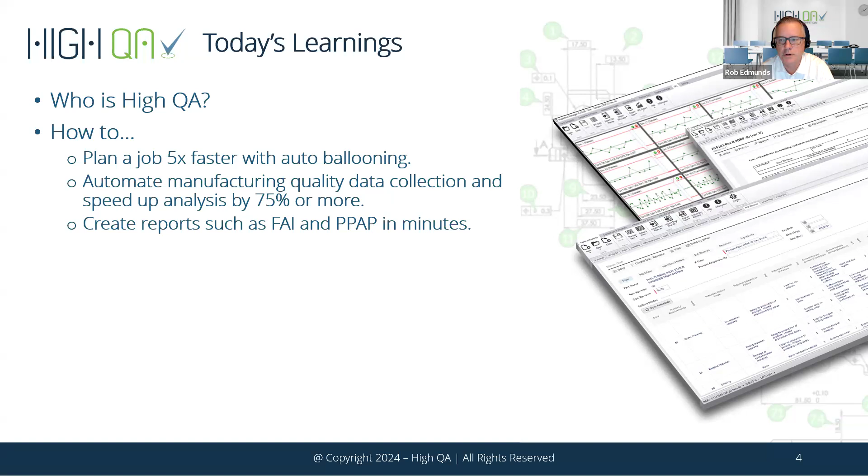We'll demonstrate how we can automate data collection, so getting those inspection results in real time. So now you have the ability to analyze all of that data quicker. Bottom line, it's real time, so it's at your fingertips. And then lastly, of course, we've got data back in the system, let's be able to report against it. So whether it's an FAI or a full submission packet, we're going to show you how we can save significant time getting that reporting out.

A little bit about High QA: over 1,300 customers globally, over 5 continents. We have over 20,000 users. Big thing for High QA is data security, but also with that, having a collaborative mindset. So let's break down some walls. Let's pull manufacturing and quality together. And then lastly, we're realists. We understand your success is our success. So we do have a customer-driven culture.

High QA is really reimagining quality manufacturing management. So pulling a system into an all-in-one database where you can plan your quality, you can capture inspection results and then report against it. And with all of that, that ensures that you're on time, on quality, on budget.

Like I mentioned, High QA is an all-in-one database-driven solution. So we're eliminating those silos of data that aren't connected, and we're pulling it all together into one database that in itself can also integrate with other systems you may have, ERPs, PLMs. So with no further ado, let's jump into the product and we'll give you a look-see at High QA.

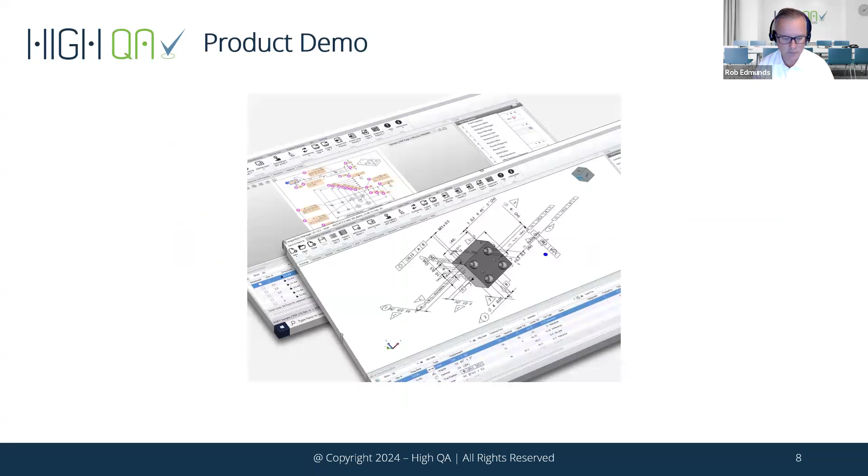Lisa, can they all see the High QA software? Yes, I can see it. Perfect, thank you. All right, let's get started.

We're going to start from a wizard. And the reason I'm doing this is it's going to allow me to establish some defaults up front for the system. And when I say defaults, we establish what are called part categories in High QA. So think of this as an area where for a specific customer or for a specific part type, I can establish defaults throughout the High QA system, whether it's simply how do I want my balloons to look, colors, sizes, all the way down to what reports are required in my submission packet. So I'm setting all those defaults up front.

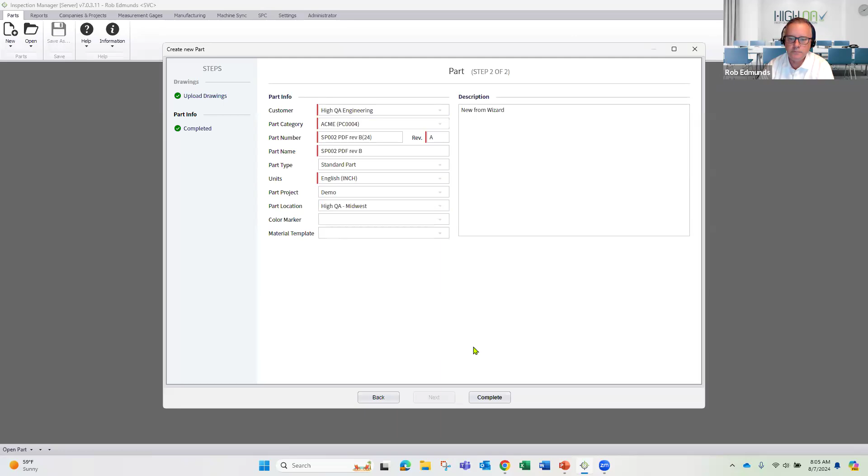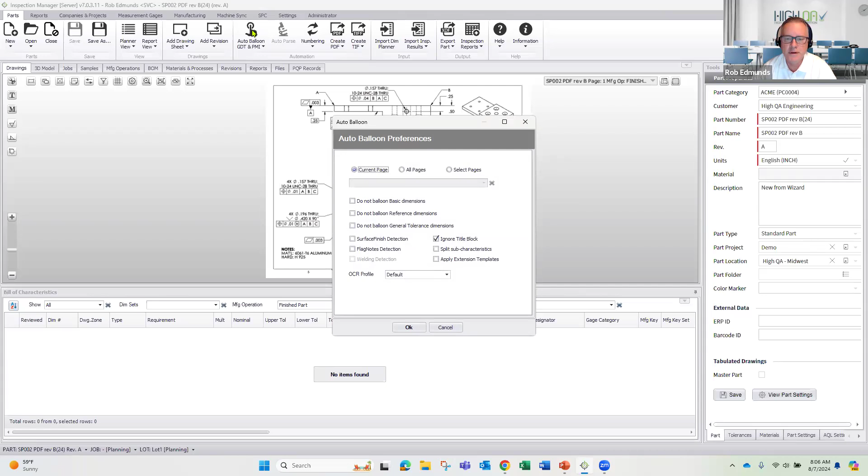All right, so I've pulled in our 2D print. We also work with 3D models, so either or. But to get started, all we're going to do is come up here and hit the auto balloon. And do note, we can handle multiple pages. If you have a packet where you need to select certain drawing pages, you can do that. You also have the ability to turn off certain things. Maybe I don't need to balloon reference or basic dimensions. I can turn those off. But we're going to hit OK.

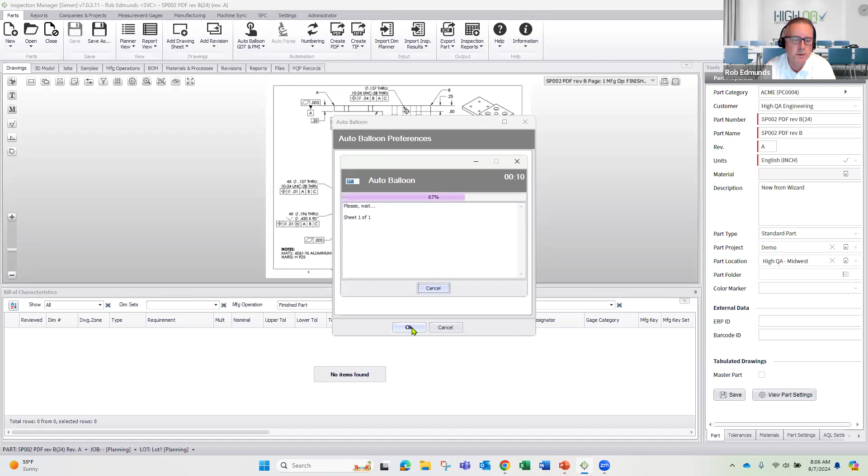And what that's going to do is engage our OCR. So the OCR is the optical character recognition software, something that we developed on our own. It is ours. It is proprietary. I always jokingly say it's not patented. We don't want anybody to steal it. It's the best OCR on the market, bottom line.

So once I've engaged that, it's determining the border of that picture. And then once it's done that, it's going through and finding all of the GD&T, all the features on that picture. It's ballooning it, but more importantly, it's also taking that through a digital transformation.

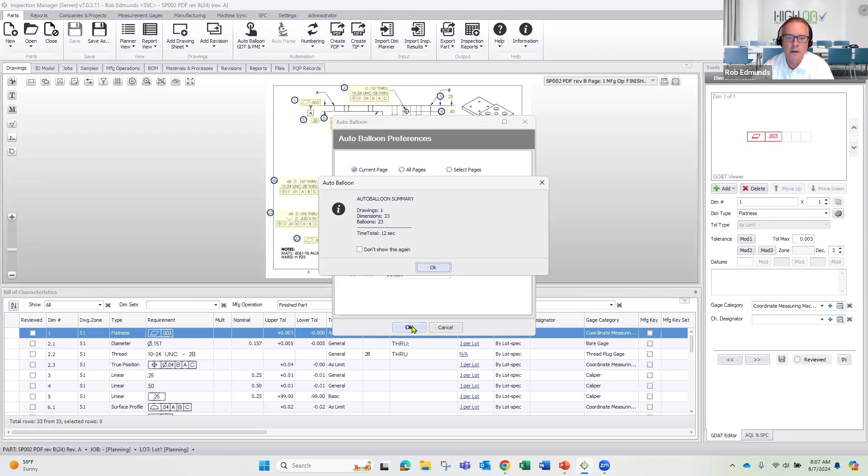So we're working with a picture, but once the ballooning process is done, now I've got executable data in what we call our bill of characteristics. So as you can see, in 12 seconds, we've got 33 dimensions, 23 balloons, and a complete bill of characteristics, right? So I now know every dimension, what type of dimension, the requirement, what are my tolerances on that dimension.

And like I had mentioned early on, I set some defaults. So one of those is my sampling rule. I've established my sampling rule as 1 per lot. And again, it could be anything. It could be AQL based. I also have the ability to establish default gauge categories based on the type of dimension. So as you can see, every linear dimension, I'm going to use a caliper.

Now, keep in mind, this is just a category. It's not the exact gauge I'm going to use. But every true position, I'm going to use a CMM. So that's all been established. Again, saving me time. I've already started to establish my inspection plan.

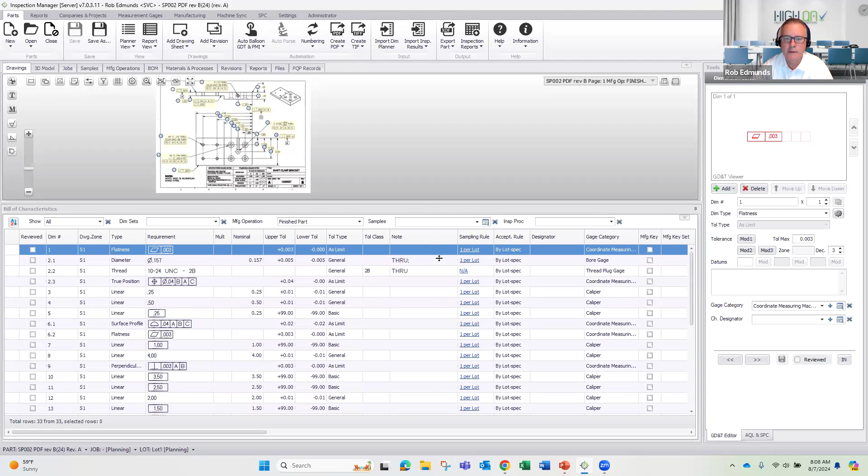Now with High QA, we provide you many tools so I can continue to use the OCR to capture additional information off of this print. So for example, when I brought in this part, it doesn't know the part number or name, it's just using the file name. But I can use these utilities around the drawing window to capture that additional information. So you could come up here and, hey, I want to extract information off my title block. I just go ahead and select that utility, and then I'm just box selecting the information using my mouse, and you'll see things update over on the right.

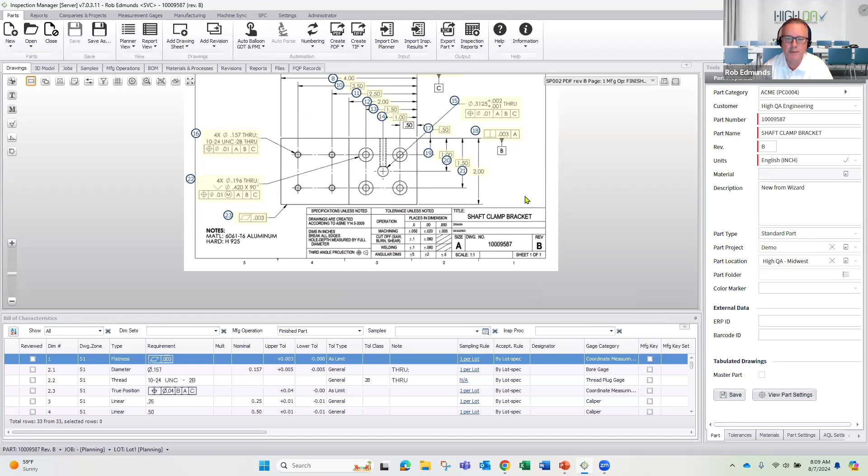So now I've got my part name. I can come in here, let's grab the part number. Let's even grab the revision. So the nice thing about this is not only am I getting the information in quickly, but I'm also getting it in accurately. I could have typed that in, but for those that know me, you don't want me typing. I'll fat finger something, then we've got incorrect data in the system.

For those of you that need to balloon notes, we provide you utilities so you can do that. Now, by default, we're not going to auto balloon notes because there's no standard around notes. So we give you this utility so you can simply come in, you box select your note, and you'll see it parse the information over on the right. But it also is now included in my bill of characteristics, and it's in there as a pass-fail. So it's going to be on my inspection plan.

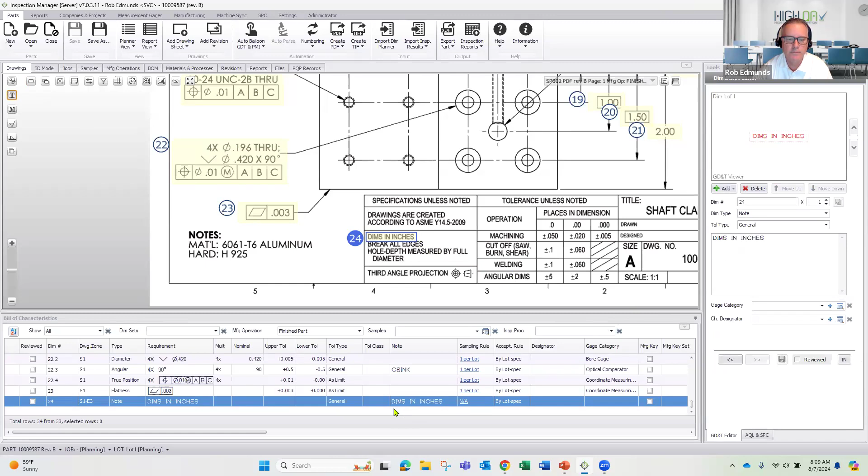For those of you that need to track material, we also provide you utilities so you can capture the material requirement off the print. And again, just box selecting the information, and you can see it now changed over to my materials and processes. So now I have my aluminum requirement in the database. Now, anytime you see a pencil within High QA, it just gives you the ability to drill in to where I can add additional information. The material code, maybe I've got a spec number. Maybe I want my supplier.

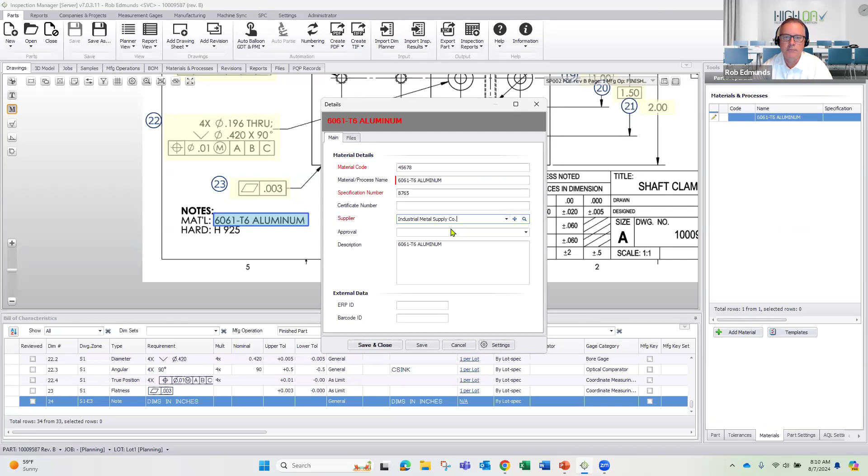But more importantly, how about being able to upload the material cert into the database so it'll flow to my reporting? I've got a sample material cert here. Let's go ahead and get that into the database.

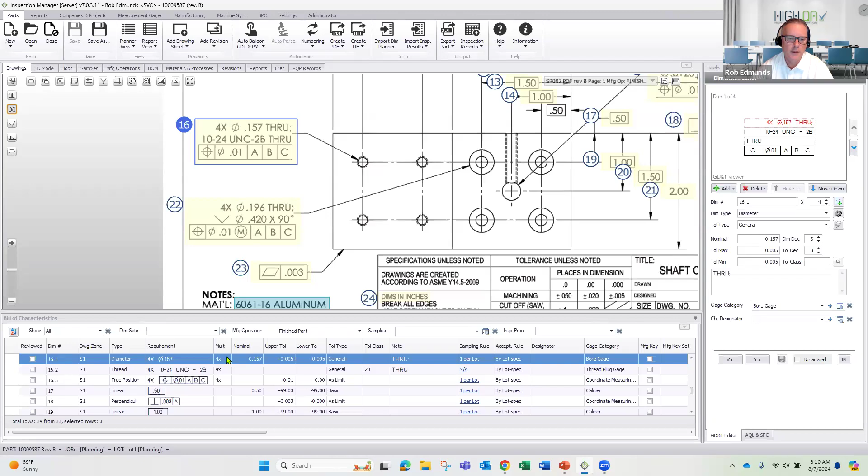All right, I already bragged a little bit about our OCR. Let's pick on one of these. So as you can see, Balloon 16 has 3 different callouts, right? It's got diameter, thread, true position, and you're seeing that in the bill of characteristics, diameter, thread, true position. But also there's a multiplier, right? Because there's 4 holes, and you'll see that in the bill of characteristics as well. So at the end of the day, we're looking for 12 results, right?

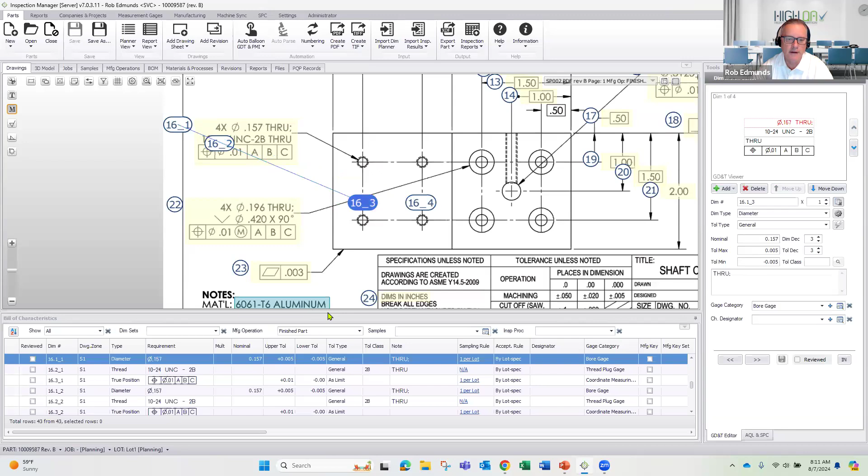Now, for those of you that run into a scenario where, hey, your customer needs you to identify each hole with its own unique balloon, we have that capability, and all I need to do is multiply out the dimensions. And now I have unique balloons, so I can identify each individual hole. And you'll see down in the bill of characteristics, now that we've done that, now we have all 12 lines. Okay. Now, for those of you that have that requirement and the print has 50 balloons, I apologize, because that becomes a very busy print.

All right, a couple more things to jump through here. For those of you that get drawings in a unit of measure that you don't want to work in, say I want to work in metric, but I'm getting this print in inch, right?

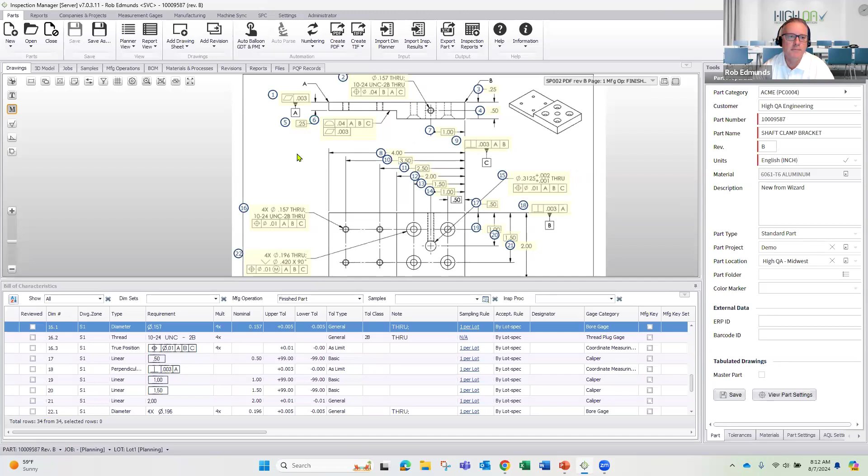Which is the default that was established before I ballooned the print. Well, if I need to see this print in metric, it's just a matter of clicking on the opposing arrows. Now the print is in metric, right? So I do have the ability to toggle between the units of measure. I can establish a plan in one unit of measure, collect the results, and then toggle back to the customer's unit of measure that they provided.

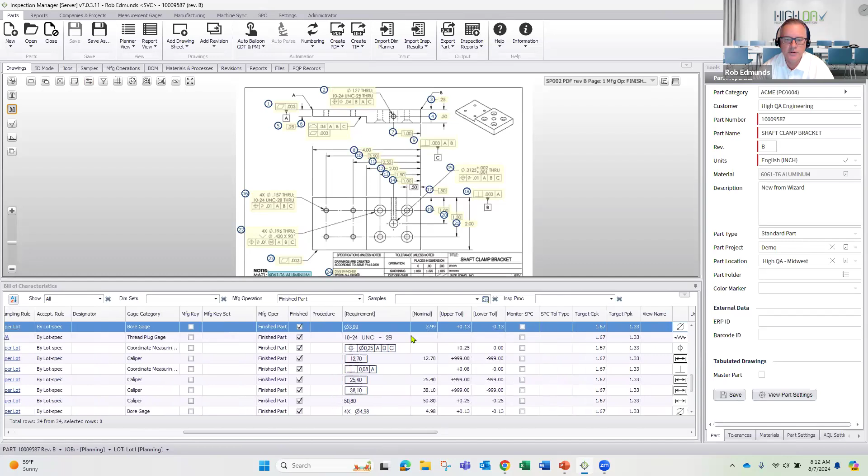And again, that's not smoke and mirrors. It's not doing the calculation when I hit the button. Actually, if you remember that first, whatever it was, 15 seconds when we ballooned the print, here is the default, which is an inch. But if I scroll over in the bill of characteristics, the conversion was already done, right? So there it is in metric.

All right, so here's another nice feature, right? We'll never claim we're going to be 100% on ballooning prints. Prints get busy, things get stacked on top of each other. The human eye has a hard time figuring it all out. But we provide you a utility called whiteout balloons. So when I click on this, it's going to eliminate everything I've captured, right? If I hover over, you're going to see them.

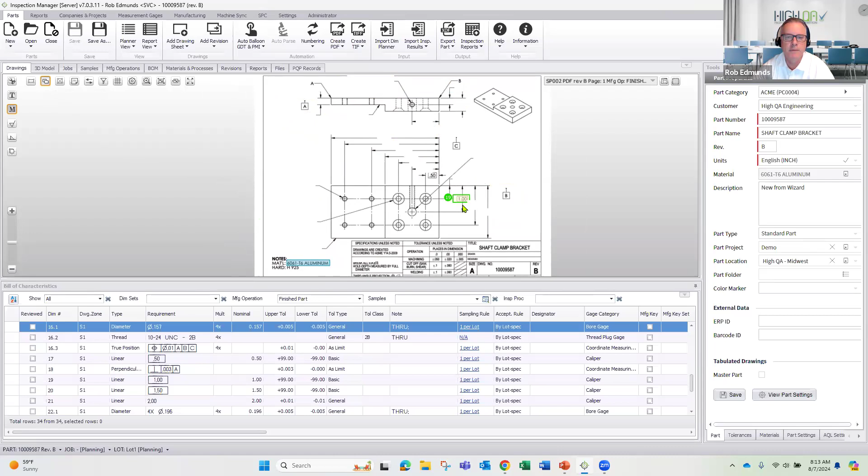But now I can easily identify, hey, we missed this dimension. And it's just a matter of grabbing the snipping tool. And now I can come in and I'm just going to box select it, let the system parse it out. It's going to determine, hey, it's linear, it's a basic dimension, 0.5. Perfect.

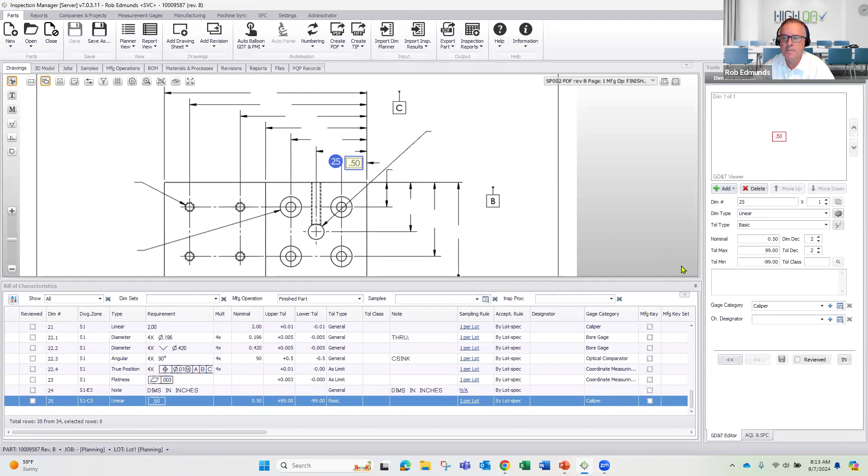But for those of you that maybe manually balloon today, this is probably one of your worst nightmares, right? Because now I go from 13, 14, 15, 16, 25, 17, right? I'm out of sequence. But with HighQA, very simple, just come up, click on the numbering, it'll renumber and put it back in sequence.

Another thing to note within HighQA, we talked already about a default gauge category, but you can also establish characteristic designators within the system. So let's say this balloon 22 is a key characteristic or a critical quality, right? We'll call it a CTQ. So when I hit save, a couple things are going to happen based on rules that I've already established in my system. So one of the things is I have my balloon simply changing to a triangle. I want it to look different on the print. It is a CTQ. Let's pay attention to it.

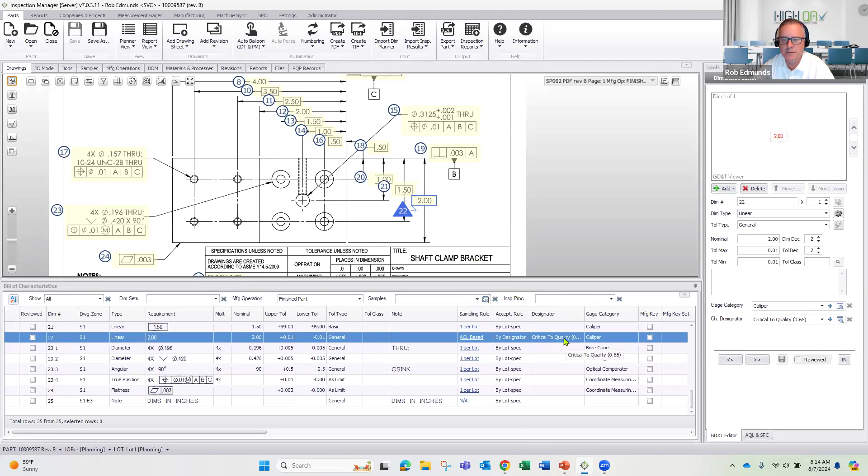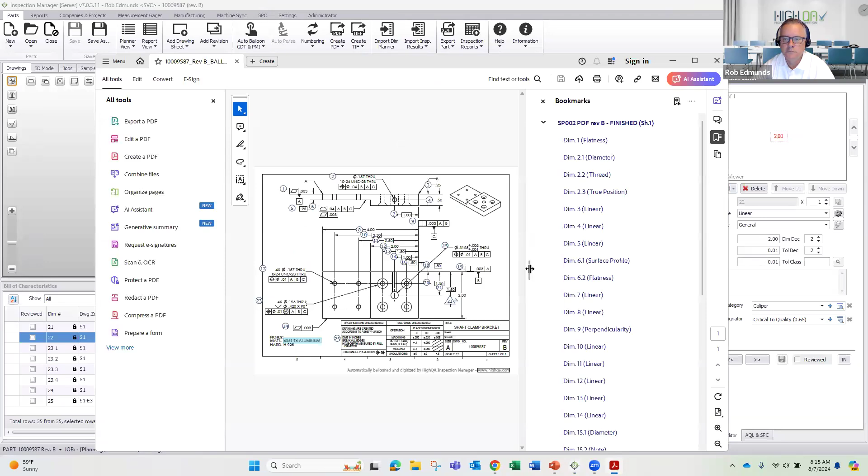But also notice down here, now that it's been established as a CTQ, I've got a rule that says anytime I have a CTQ, change the sampling plan to be AQL based. So those two things happened automatically. So that simple, guess what I've got now? I've got a ballooned print, but I also have the ability now to create my inspection plan.

So I know every dimension, the requirement, the tolerances, what measurement tool I need to use, and even the ability to capture actuals within this inspection plan and re-import them once it's done. So that would be the most basic way to get results back into HighQA, but we're going to talk more real time as we move through this demonstration.

All right, really quickly, I want to jump into our gauge management. So gauge management is in the core HighQA system. Of course, we're going to track all the information you would expect, right? All the gauge information. We do have the ability to track location of gauges if you're using our shop floor data acquisition interface that has check-in, check-out capabilities.

But the big thing is we're going to track all your calibration information. In fact, you can see right here, my bore gauge is red, right? Well, it's because it's coming up on its expiration. So we need to jump on it and get that thing calibrated before the 1st of September.

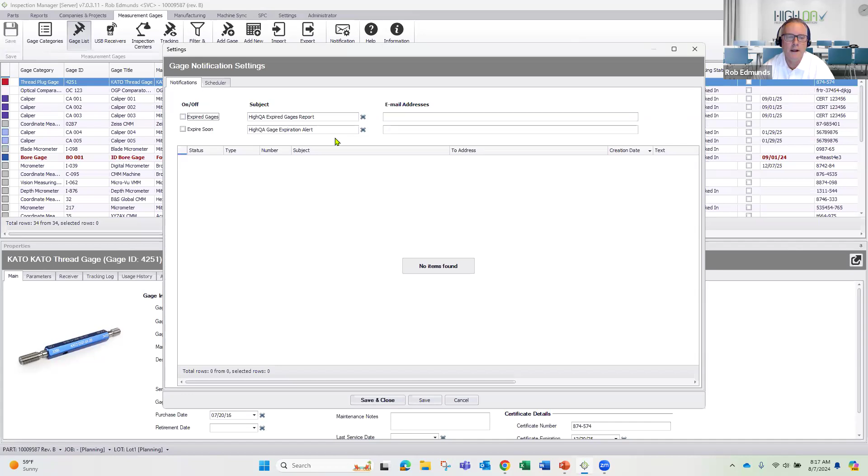All right, let's jump back over here. And I'm sure many of you do in-process inspections, so that's where we're going to go next. I'm going to go into an area called manufacturing operations. So all these different dimensions are associated with the finished part, but this is where I could start breaking things down into different operations, right?

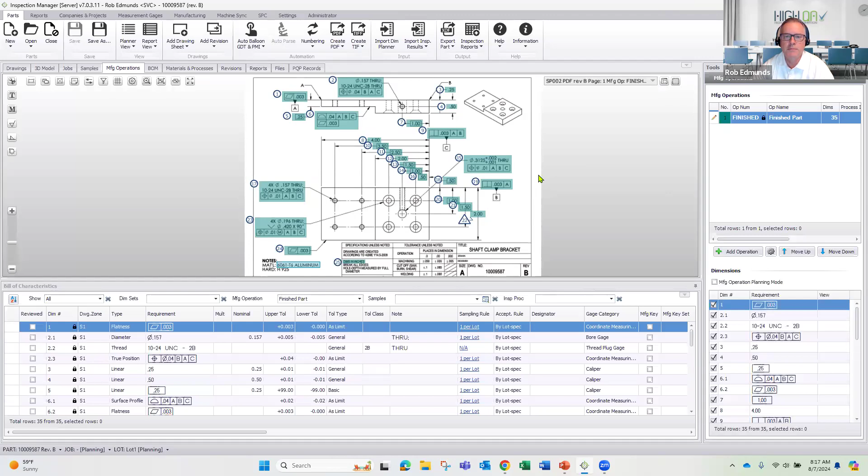So let's say I'm starting with my block of aluminum and I'm going to rough out that part. That's my first op. So I'm going to come in here and select some of these dimensions. Let's just grab some of these overall dimensions. We'll grab the height here, and we're going to add an operation. So now I can come in and say, hey, this is my roughing op.

Now, for those of you that are doing submission packets like a process flow, a PFMEA, control plan, this is where we can start associating the process to the operation. And those reports will now be dynamically generated based on the choices I'm making, right? The reports are already established, but now I'm going to dynamically populate them through these different steps in my planning process. So I'll grab my roughing process.

Now, within HighQA, we have what is called a process library. So it'll define all the different processes in your organization, but also it'll maintain the failure modes for each one of those processes. So we've templatized that. So as I start building this out, my process flow, my PFMEA are all getting populated based on these choices I'm making. Let's grab a couple more.

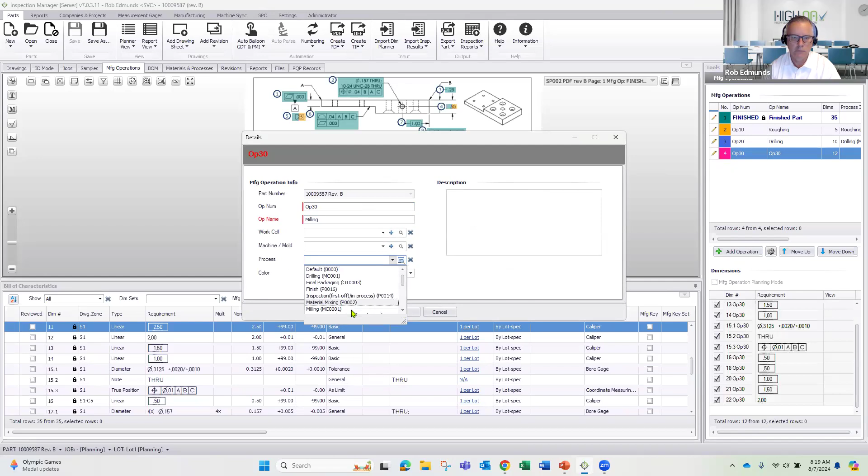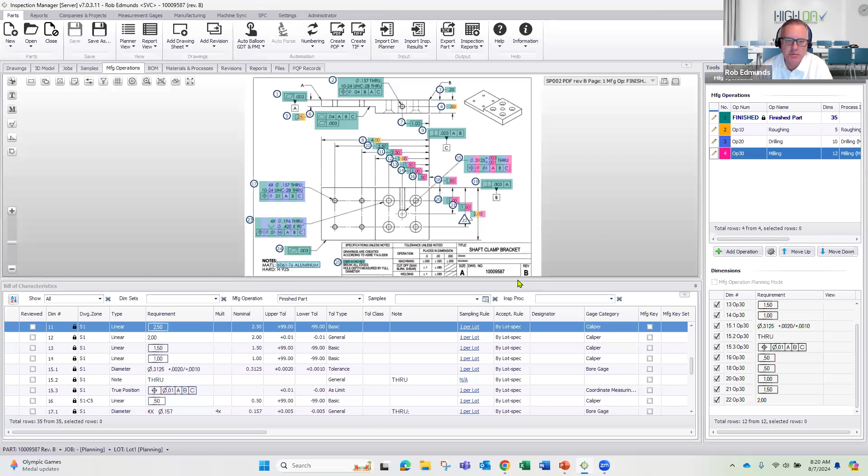All right, so now we've got our Easter Bunny print or Candyland print, whatever you want to call it. By the way, you do have complete control over the colors, but we've got our 3 different operations established. Let's take it a step further. Let's go back to that roughing op. So now I've got a print just for my roughing op, and there's the 5 dimensions that I want to pay attention to. But also note, my requirement here is associated to the finished part.

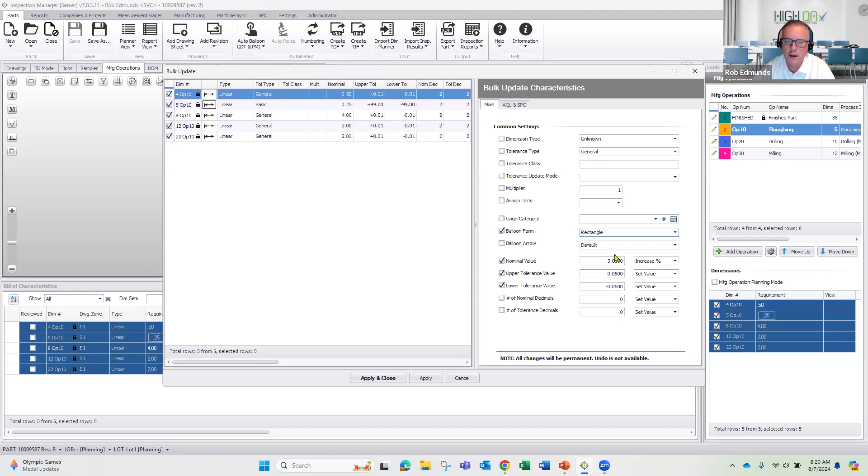Well, this is a roughing op, and I'd like to leave a little bit of material. So with High QA, I have the ability to come in, grab all these and do a bulk update in which I'm going to say, I want to add 3% to my nominal. And let's even open up the tolerances. Let's say we want plus 50 thou and minus 50 thou. And just for kicks and giggles, every roughing op, I want to use a rectangle as my balloon shape. We're going to go ahead and apply that.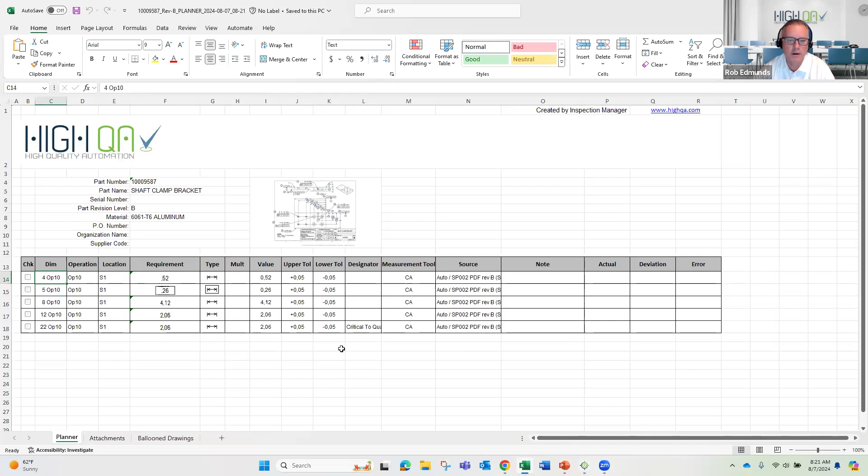So now I've created an inspection plan for my roughing op in which my nominal values have all been increased by 3%. So I ensure I leave a little bit of material, and my tolerances have all been opened. All right, hopefully everybody's following.

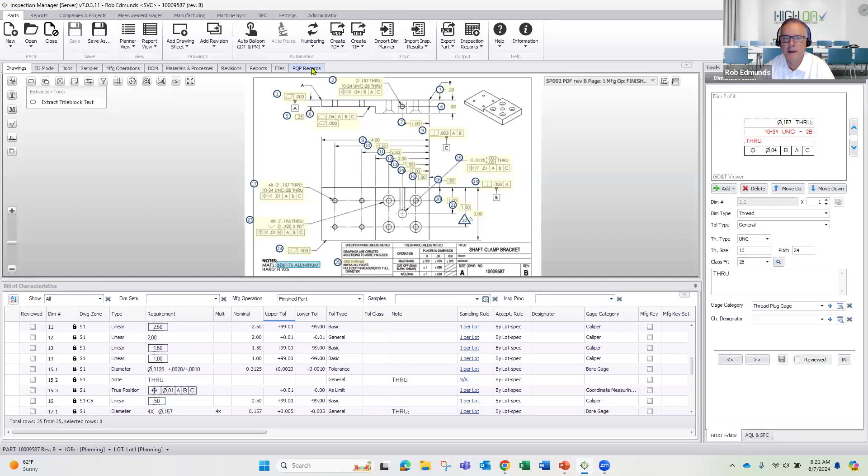We're gonna leave manufacturing operations, and I want to jump really quick into submission packets in our PQP. Right, so your PPAP submissions. Let's go ahead and jump in here, and I'm going to create a job. Let's call this, and we're going to make, we'll say 100 of these. And notice we're going to automatically create those PQP documents.

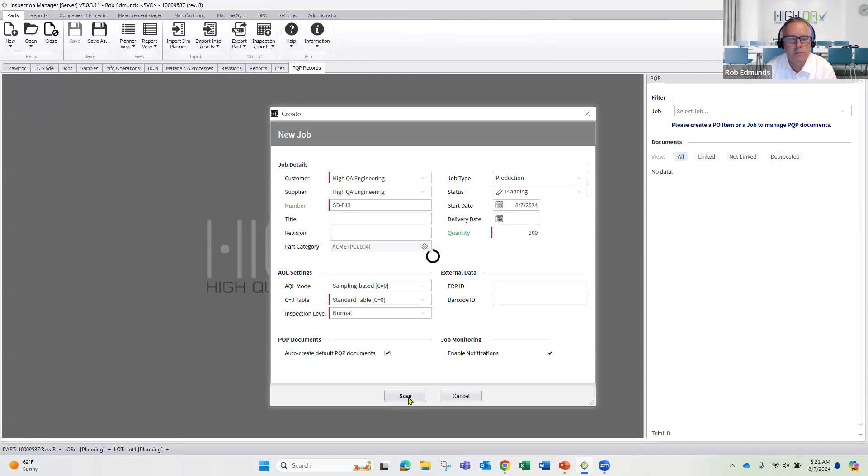So based on the part category I had chosen, these are the reports that are required for my customer, right? I have a process flow, a PFMEA, a control plan, and ultimately my FAI. So let's take a look at that process flow. I had mentioned, as we're starting to do our planning, that these reports are dynamically being populated. So you can see I've got now my roughing, drilling, and milling.

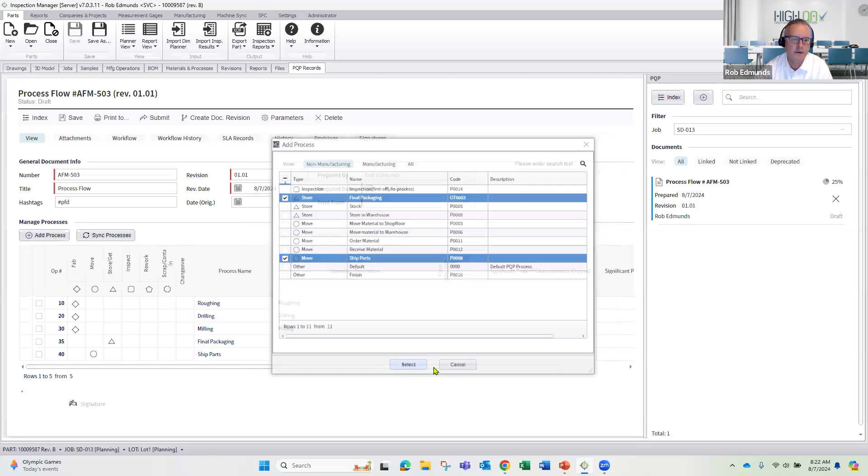I also have the ability to come in and add maybe some non-manufacturing processes. Let's say we've got final packaging and we're going to ship parts. Let's go ahead and add those. All right, so just like that, process flow is in place. Let's go back to our index, and do note, I could have had my PFMEA created, my control plan created, all of that could have been done.

But for demonstration purposes, I'm going to walk you through how we build these out and let you see what's behind the scenes. So we're going to go ahead and create our PFMEA, and it's a nice little wizard that's going to walk me through building out that report.

Now, one thing to note, if you see my process flow has a serial number, well, that's going to be tied to my PFMEA and my control plan. Reason for this is, should something change in one of those reports, they will be synchronized, meaning you're going to get alerted that, hey, I need to update this report because something changed in one of the other reports.

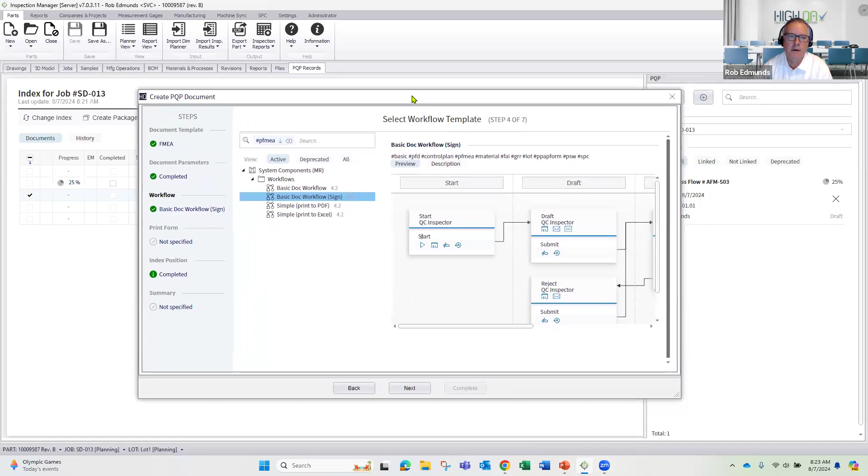Go ahead and hit next. The other nice thing about the PQP is all this reporting is driven by a workflow, and it can be anything you want. I've got mine set as just a basic workflow with a digital signature, right? So my inspector is going to go ahead and put together a report. They submit it. The quality manager either signs off or sends it back to the inspector: hey, you need to do some of these updates, get it back to me. Ultimately, I approve it, and now it's ready to be submitted to our customer.

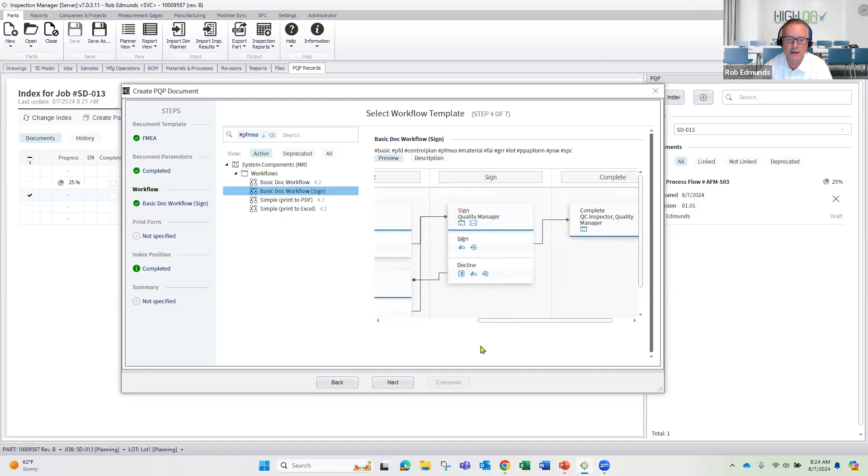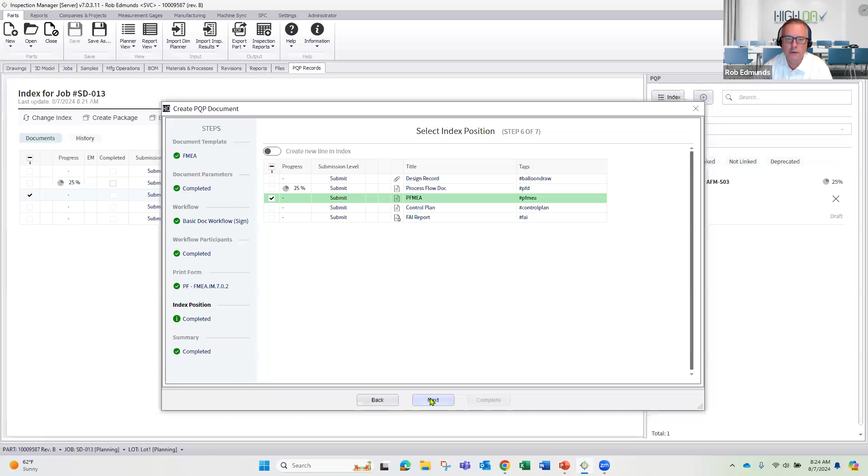You also have the ability to assign individuals or teams for these different reports. And again, I don't have to do it right now. I could come back after the report's already been established. Let's go ahead and get our PFMEA all set up. So in a matter of a minute, I've got a PFMEA. So every one of my processes, my failure modes, and you know it, right? So this is all driven from that process library where we've templatized things. But if I need to make a modification now that it's at the job level, absolutely can do it. Maybe this is an 8 and it'll automatically calculate.

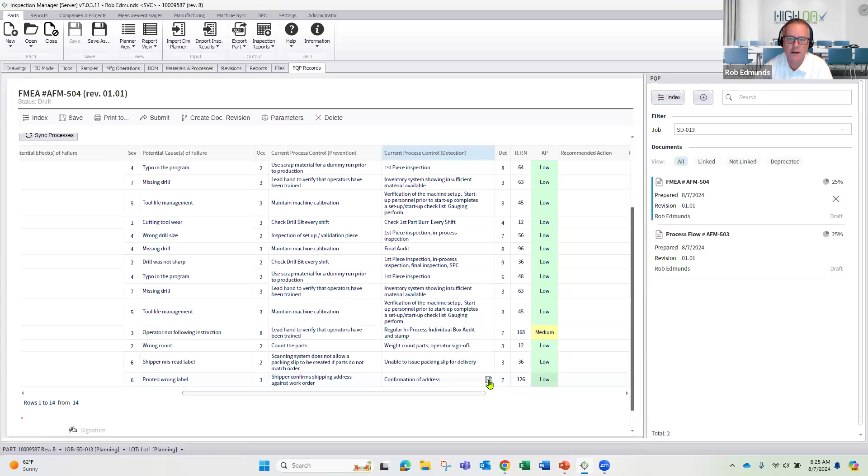All right, one more report. I want to do the control plan, always my favorite. I'm going to quickly go through it. You guys have all seen the behind the scenes here. So let's go ahead and create this. But again, going to point out, control plan is also tied to that process flow serial number. Our workflow, people involved.

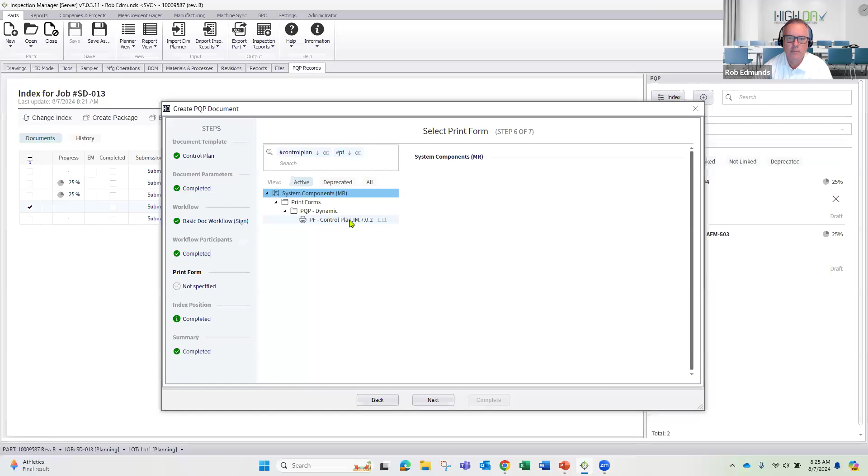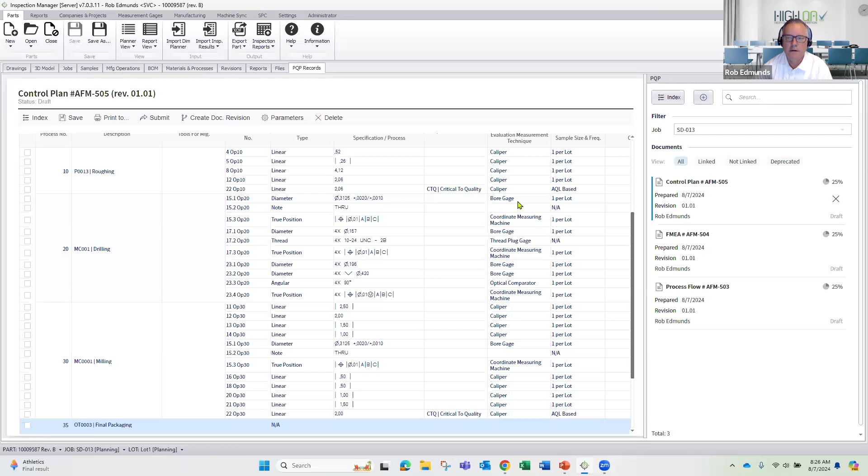This is why this is my favorite, right? We went through and we defined those different processes and the dimensions associated with them. So now I can see, hey, my roughing operation, there's the 4 dimensions, one of them being a CTQ, my measurement technique in place, my sampling plan in place. All right.

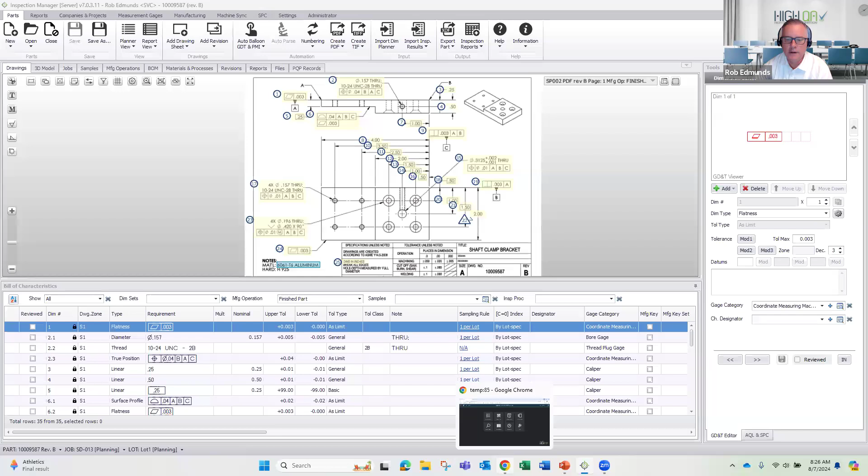Guess what? Last thing we have to do is let's get an FAI out, right? But to get the FAI out, we need to capture some results. So let's talk a little bit about how we go about in HiQA capturing results real time, which ultimately saves you time, right? So one of the methods we have is through our shop floor data collection interface. Let me get logged in here. So this is meant for any kind of manual measurements, right? So, hey, I've got to measure this. I'm using a caliper. Let's get the results in.

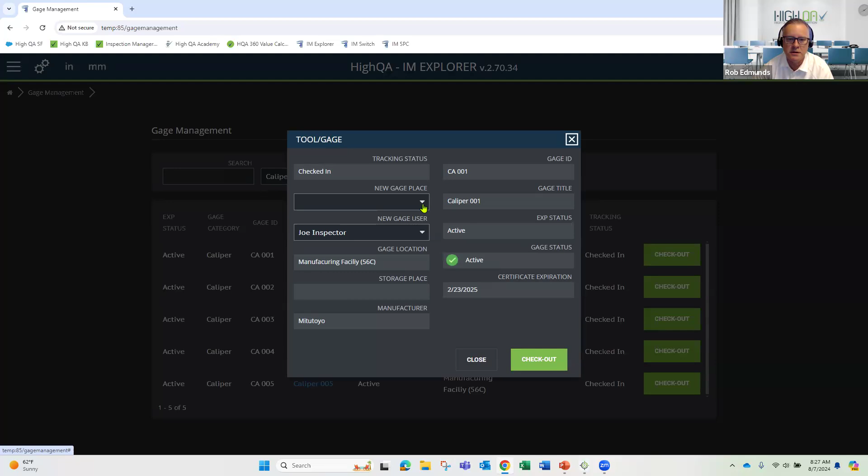A couple things to note. If you have barcoded job travelers, we do support that, right? Makes it easy for the inspector to log directly into the job that they're wanting to log into. This is the gauge area where I can come in and check out gauges, right? So say I need a caliper. Well, here's all my calipers. I'm going to go ahead and check this out. And because we're database driven, it knows a lot of the information already, right? I simply have to say, where am I taking it? I'm going to go ahead and check it out, take it to the inspection lab.

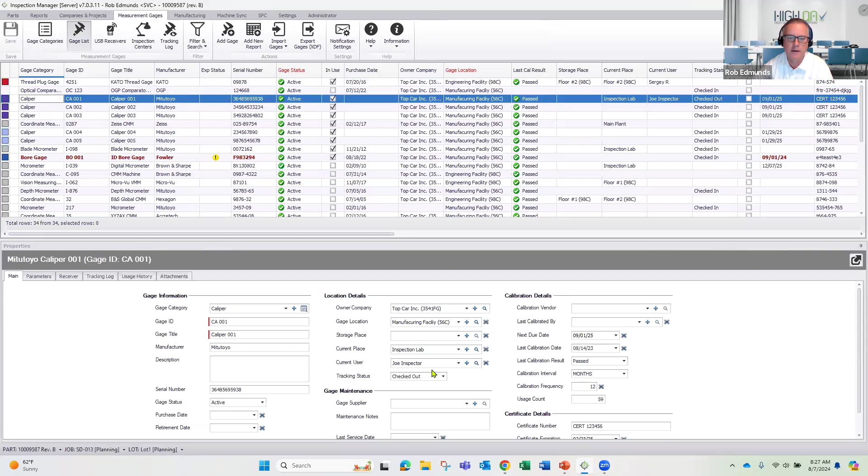Now, again, all of this is real time. Somebody logs in, hey, they wanted caliper 1. Well, Joe's got it. Same goes for if I go into the main system and we go into our gauge management. And if I go to caliper 1, we can see Joe's got it in the inspection lab. So again, all real time. Joe gets done with it. He's checking it back in, returning it to storage, and we're all set. All right, let's log into that job we're working on.

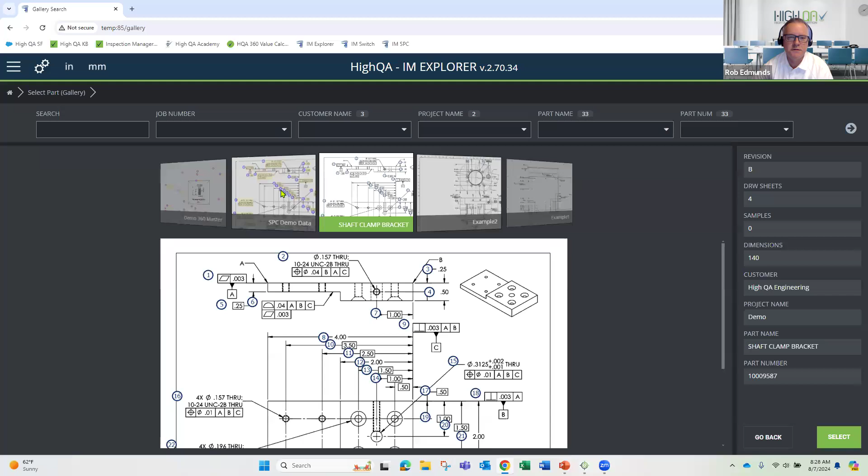And again, this is also where people that have seen my demos in the past, they love this because I get to make fun of myself. Anybody looking for a Journey Escape album, they remember the first generation iPods. We have that functionality right there for you.

But let's go ahead and log into that job we're working on.

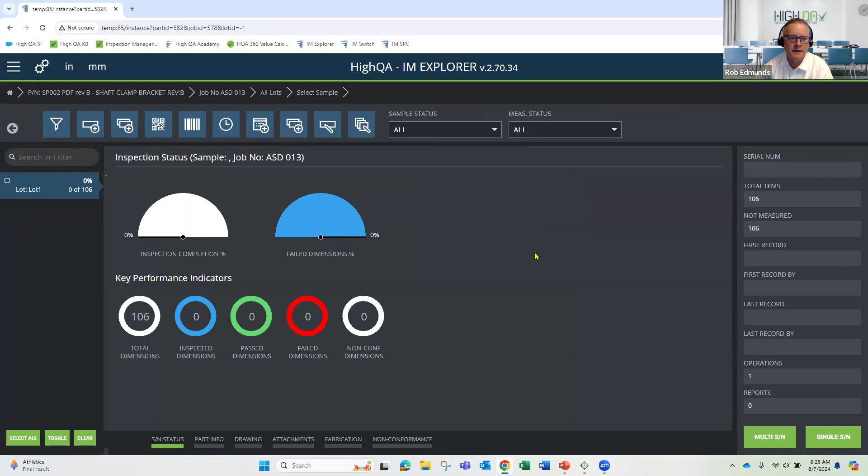And you can see a nice little dashboard. Obviously, we haven't inspected anything. So let's jump into that job. And it immediately takes me to the finished part. But hey, I'm working on the roughing op. So let's go ahead and change over to that roughing operation in which there are those 5 dimensions that I need

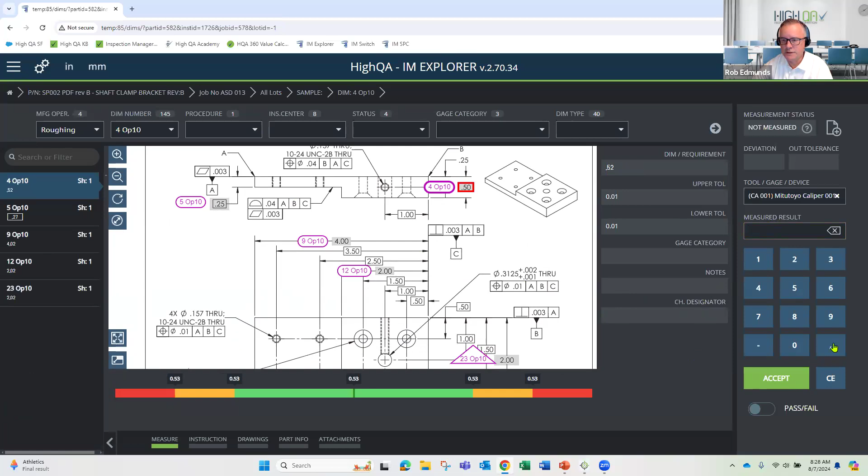to measure. This is another time to mention we do support wireless gauges. So if you have any Bluetooth wireless gauges, this is flashing orange because it's listening for input. But I'm going to do it the old school way, and we're going to enter our value, hit accept, and it's real time, right? So I get real time feedback. Turns green, green's good, moving on to the next.

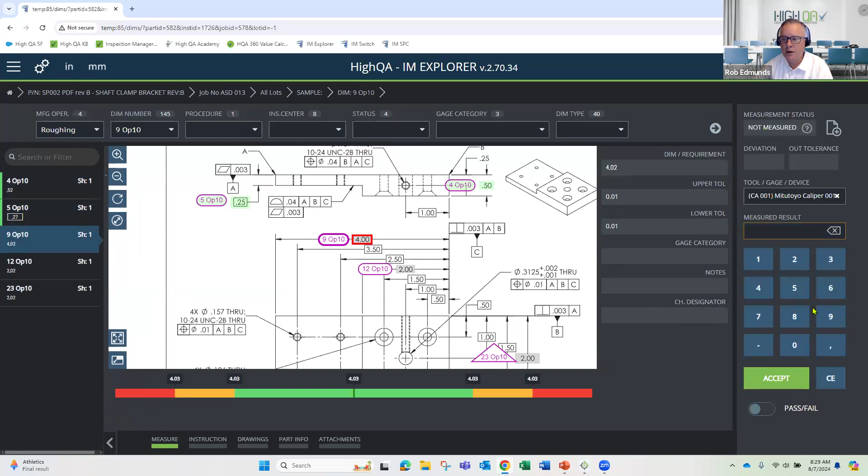Now, if it was say a snap gauge or a go/no-go, that dimension would come looking like this, to where I can simply say, hey, it passed, hit accept, and we're moving on to the next. Now, should I enter a bad value? It's going to immediately prompt me, hey, wait a minute, this is out of spec. So do note, the result hasn't been saved yet because it's giving me the opportunity to measure it again. But if it truly is bad, I can go ahead and keep it failed.

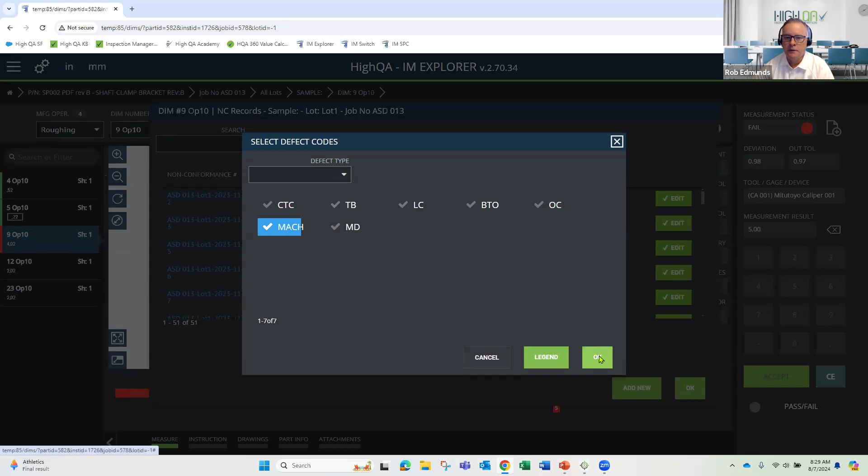And now at the point of failure, I can initiate a non-conformance, right? To where, hey, it's scratched. And of course, this would default to your defect codes. But just like that, I've initiated a non-conformance. And like the notifications we have in our gauge management, we have those around non-conformances as well. So whoever needs to be notified is alerted that, hey, this part on this job, this dimension just failed.

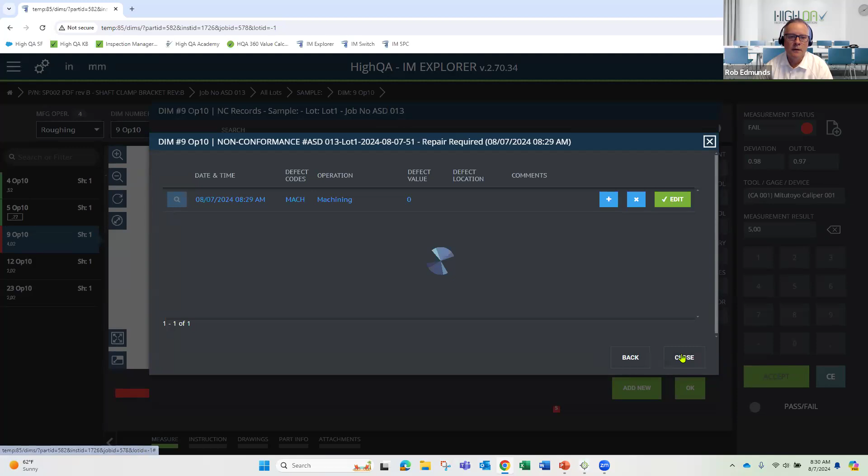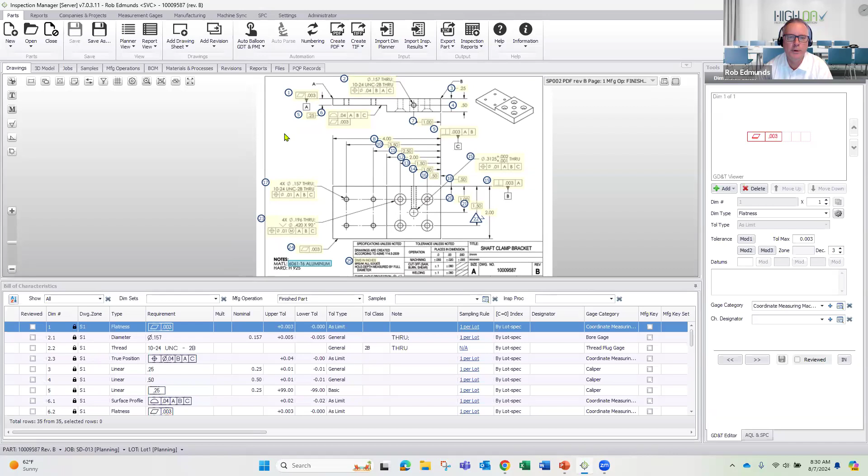All right, so that's one way to get data into the system in real time. Another way to do it is through what we call automatic machine data import. So for those that have, say, CMMs, VMMs, FaroArms, whatever it may be, any kind of measurement device that runs on software that will output a results file, we can automatically pull that in.

I'm going to try and get the Zoom meeting thing to go away. It won't go away. So I can get at my buttons. All right, bear with me. I got to skinny this thing down to get at my buttons.

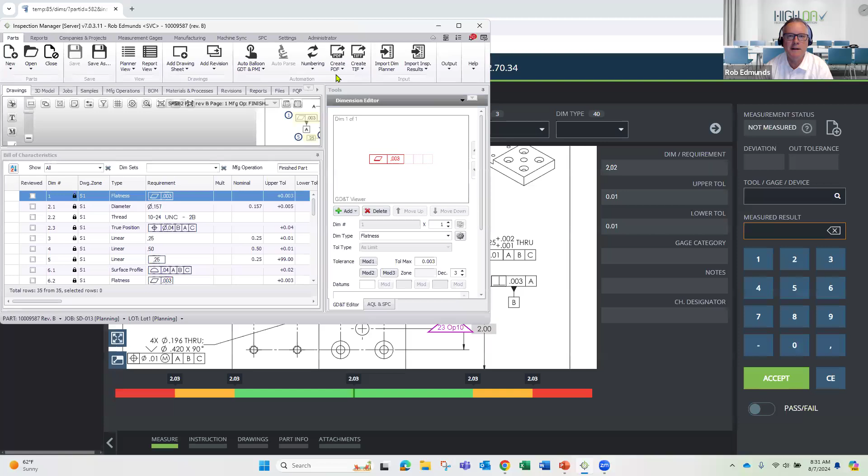All right, we're going to go into machine sync, expand this back up. So for every one of your CMMs, VMMs, whatever it may be, we're going to establish a folder on your network. And that folder is where the results file is going to go. And all we're doing is simply listening for results to hit that folder. As soon as they do, we're going to go ahead and import that data. So we'll have the results coming in.

It's a background kind of routine. Doesn't require anybody to do anything. Your inspector is going to simply run the part on the CMM. It's going to measure all the features. The results file goes to the folder, and boom, it's coming right back into HighQA.

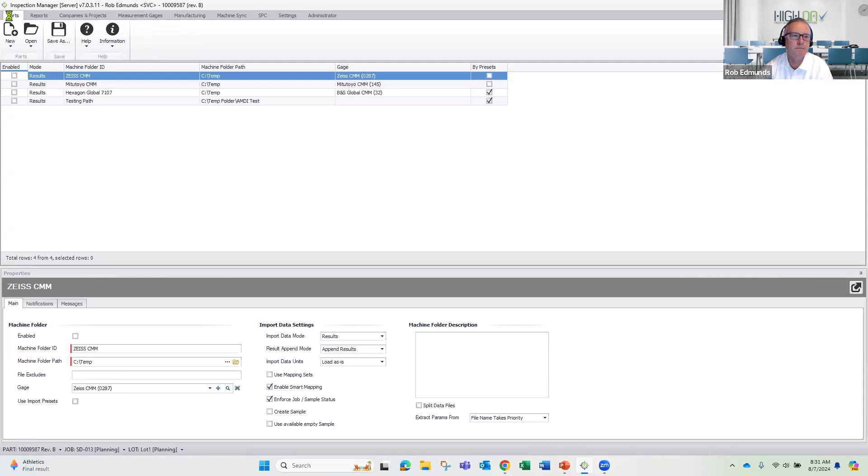All right, to simulate that though, I'm going to manually import some results. And I have kind of a mock-up CMM type report that I'm going to pull in. So we're going to come in here and just from a file, I'm going to import some results. And you'll recognize this, for those that have those. Very standard, comma delimited type file, all the different features and the results that we captured. So we're going to hit import.

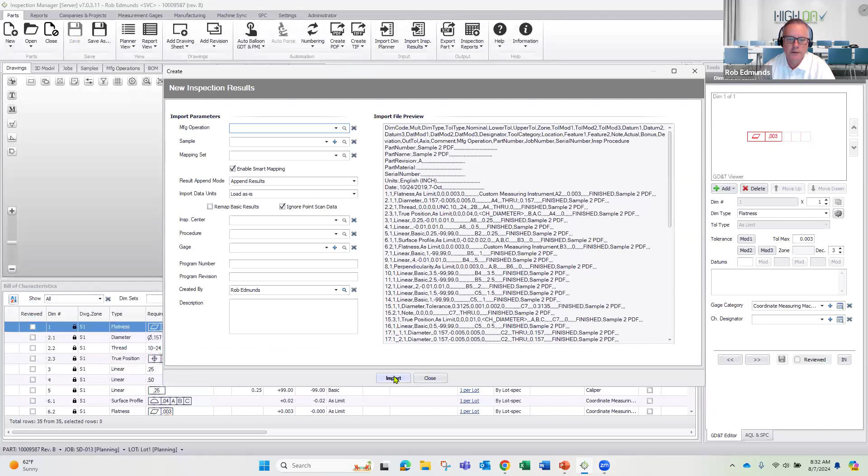And by doing that, data is going to come in, and now I've got visibility of how we're doing on this part, right? So green's good. We already talked about that. Now, gray means I don't have results, right? So looks like we've got our diameter. It passed. We'll go to the next. Oh, we haven't done our thread. Well, the thread's not going to get measured on my CMM.

So this is another way I can get results into HiQA. I can say, hey, it passed. And oh, by the way, I used this specific gauge. Hit save. Green's good. Now, pink is unique. Pink means, hey, you've got results in here. It seems valid results, but something's off. Well, we have what is called results mapping in HiQA.

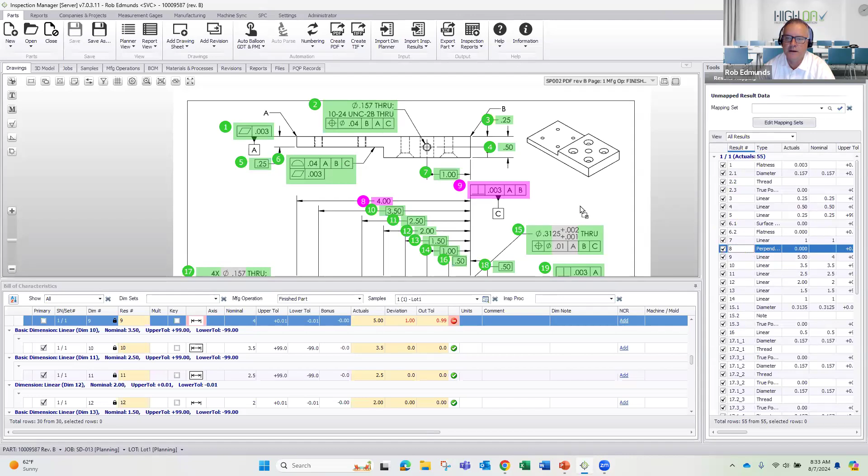Let me grab all my results here. And if we look at dimension 8, the results said it's supposed to be a perpendicularity, and balloon 9 is supposed to be a linear. Well, they're just flip-flopped, right? So this allows me now to reassociate those results with the correct dimension. So I'm just dragging and dropping and associating those dimensions with the correct balloon, right? So balloon 8 failed. Let's take a look at it.

Why isn't it jumping? Come on, play nice. Oh, bear with me. Results editor. Yep, 5 inch, it was supposed to be 4 inch. Yep, it was a failed feature.

But now that we have results in, let's go ahead and produce that FAI. So we're going to jump back into our reporting. And as you can see, you can have as many different types of FAIs as you need. I'm just going to simply do an AS9102. We'll go ahead and quickly get through this. You've all seen this.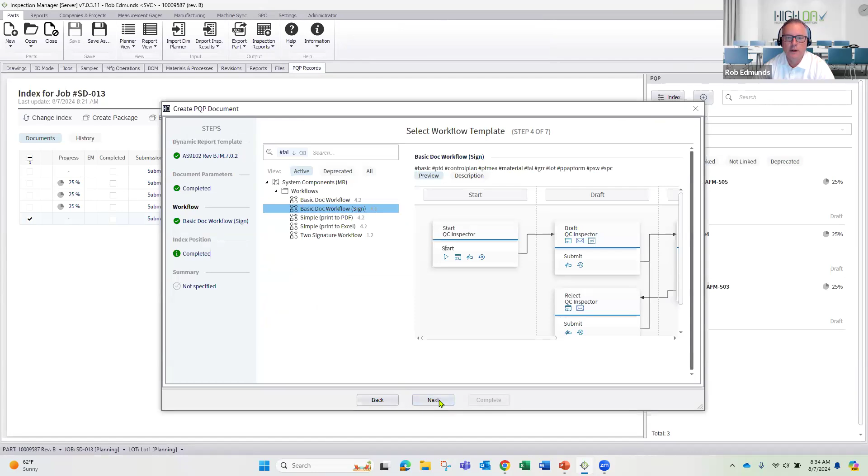But there we have it. In a matter of minutes, we've got our FAI. So form 1 with all the information we pulled off the print. Now do note these are dynamic reports. So anything here in yellow means I can add additional information, right? Maybe I've got a PO number that I need to establish.

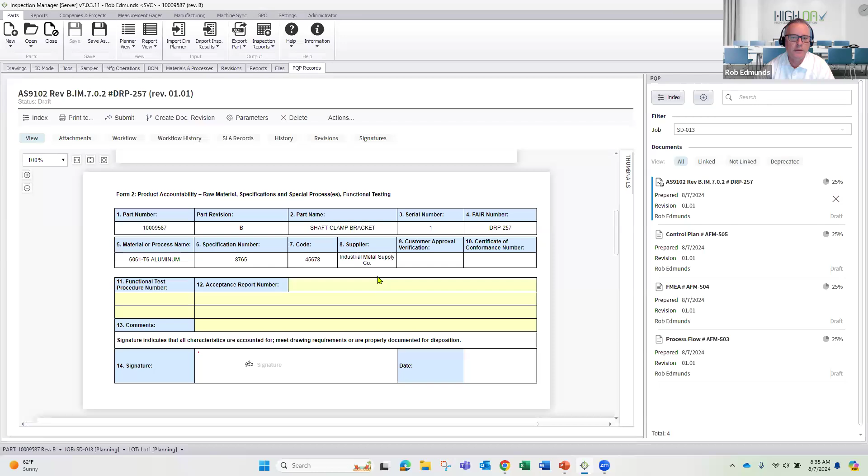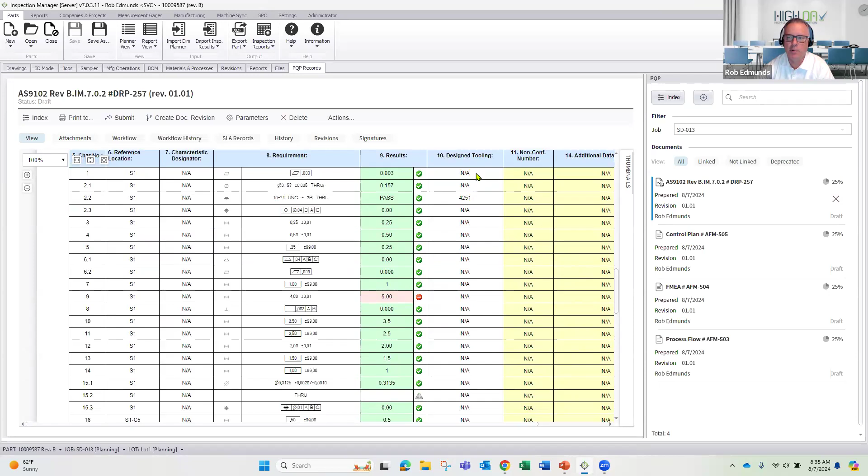There's my form 2 and the material we pulled off the print. All the way to my form 3, the failed feature. There's the exact gauge I used for passing that thread that I inspected. Now, if my CMM report would have had the associated CMM, that would have been established in the report as well. That report simply just didn't have it, which is why it's NA. But just like that, I've got an FAI put together.

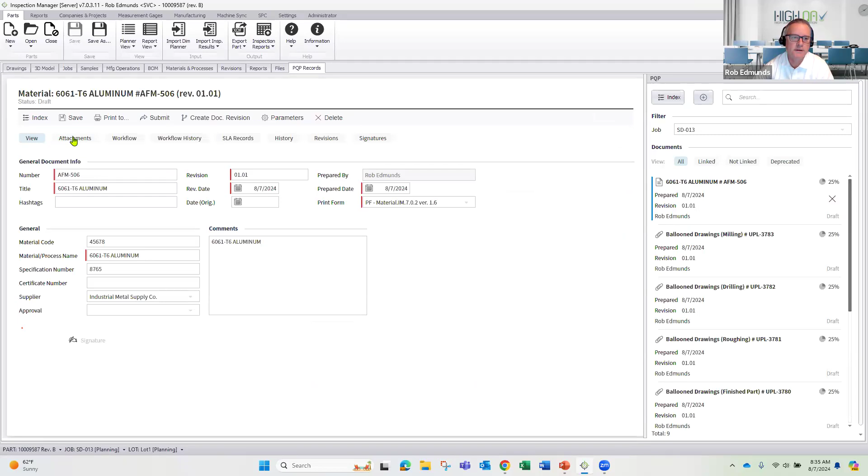And another thing we'll want to do at this time, right? We're putting together our final submission packets. Let's go ahead and sync materials and drawings. So we'll have our balloon drawing as part of the packet, as well as the material, all the way down to, right, I've got my material requirement. And if you remember, when I established that, I also attached the material cert. So that's been embedded.

Now, because we have that workflow, it really acts almost like a project management for your reporting. You can see I've got a 25% progress, in which my inspector or whomever's in charge of these reports needs to get them submitted to the quality manager for you to sign off. As soon as we hit 100%, meaning everything's been signed off on, we can go ahead and build the final package, which will consolidate everything into a single PDF, all the reports that are easily submissible to your customer.

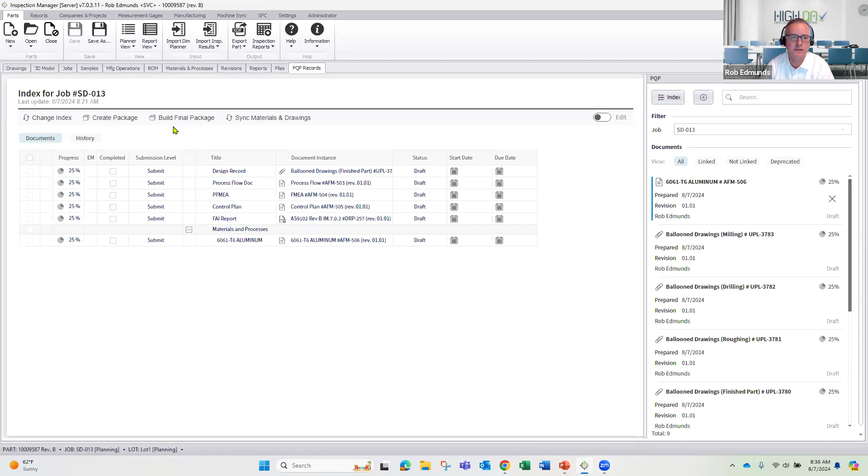I wanted to come back to one thing I forgot to mention in gauge management. It's a big part of High QA, and the reason we have gauge management as part of our core system is for every gauge, we track usage, right? So for this gauge, I can see every part number, job, lot, serial number, all the way down to the dimension it measured, whether it was good or bad, including date and timestamp and who did the measurement. So it plays a huge part of traceability.

But also keep in mind little things like a dropped gauge. I used this gauge, I checked this feature and it failed and I don't believe it. So I grab a different thread gauge and sure enough, it was good. So let's do the tiebreaker, grab a third thread gauge. Yep, it's a good feature. Oh, nuts, I've got a bad gauge. Well, when was the last time that gauge measured something good? High QA easily can research that and get right to it, as opposed to digging through different work orders trying to figure out when was the last time that thing measured something good.

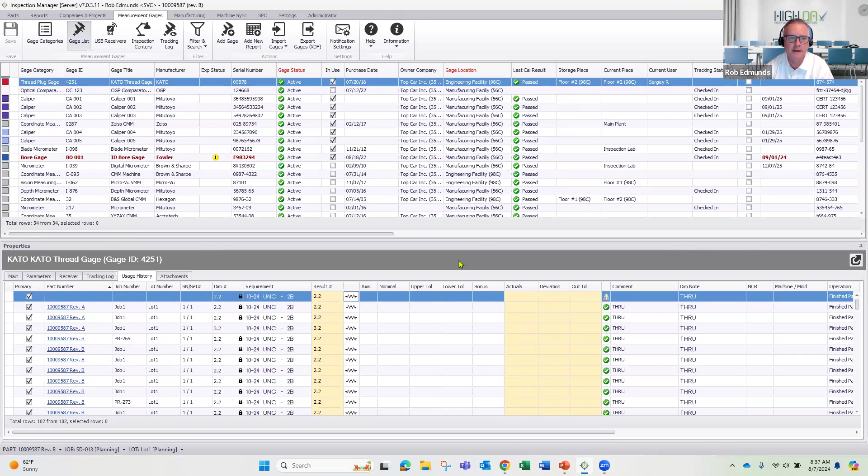All right, that's the end of the overview demonstration. So let me jump back into the PowerPoint, and we're going to cover a couple more things here.

So again, High QA, as we evolve the 360, currently we are strictly on-prem, but we are going to move to a cloud-based system as well. So next year, you'll be hearing about High QA as a SaaS model. But do note, everything's based around security. So it'll be hosted in AWS GovCloud. There will be end-to-end encryption, as well as obviously ITAR compliant. So many of our customers are ITAR compliant. We have to be that way. So it's at the foremost of our thoughts, ensuring that.

The other big release will be our supplier quality. So picture being able to plan out a job and pass it on to your suppliers. Basically think of it as now your suppliers are an extension of your own shop floor. So more to come on the hub side of things. The other thing I mentioned a little bit is being able to integrate with other systems. High QA does have a RESTful API that allows you to integrate with any other software that has an API. So whether it's an ERP or an MES, whatever it may be, we have the ability to integrate to your existing systems.

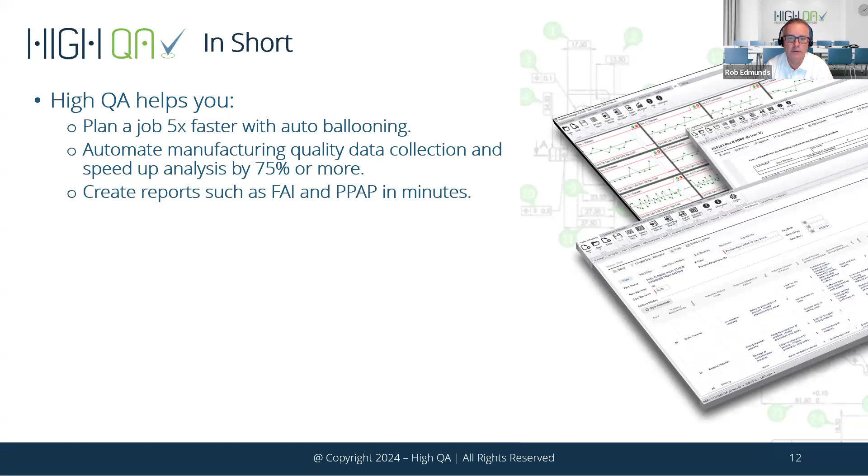But also being able to capture your inspection results real time. Let's get those results back in so now you can assess things and understand, hey, how are we doing, right? Where can we improve? Let's capture failed features early in our process as opposed to at the very end. And then of course, once we've got results into the system, once we have that data, let's do a PPAP submission in minutes rather than, for many of you, weeks, right?

All right, Lisa, that's the end of my show. Hopefully I did okay time-wise. Didn't burn up all of our time. Perfect. Thank you so much, Rob. Okay, let's get started. We did have a couple of questions come in while you were presenting, so let's take a look.

Good. Let's see, the first one says, do you offer service in Spanish? So I know our 360 product, when it gets released, will be in Spanish. The one thing I can say is all of our support, so whether it be our High QA Academy courses, which are online courses that provide you the foundation of how to use High QA, that is available in Spanish. We also have one of our professional services reps who is fluent in Spanish. In fact, he spends a portion of his time in Mexico. So we have that available to you as well.

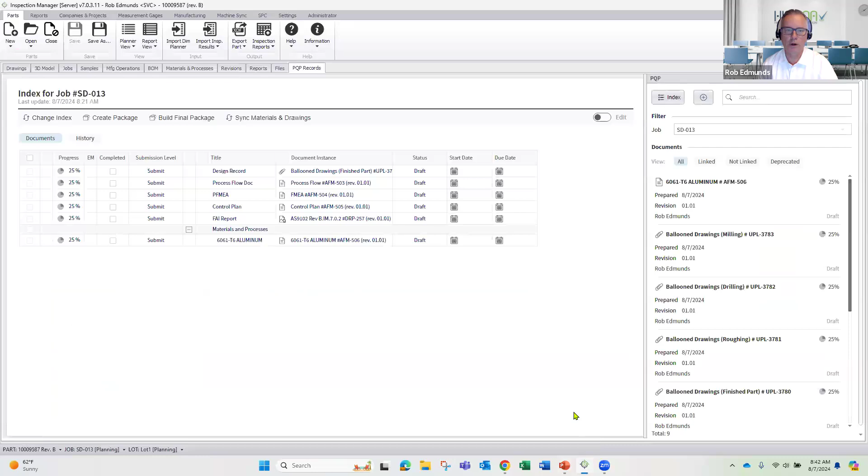Okay, great. Here is another question. It says, where are you getting all of the tolerances from? Yeah, so let's do this. Let me jump out. So if the feature on the print itself has a tolerance, that is what we're grabbing. But if the feature doesn't, say a basic or reference dimension, right, we're going to what we call a default tolerance table. Let me get back to my core drawing here.

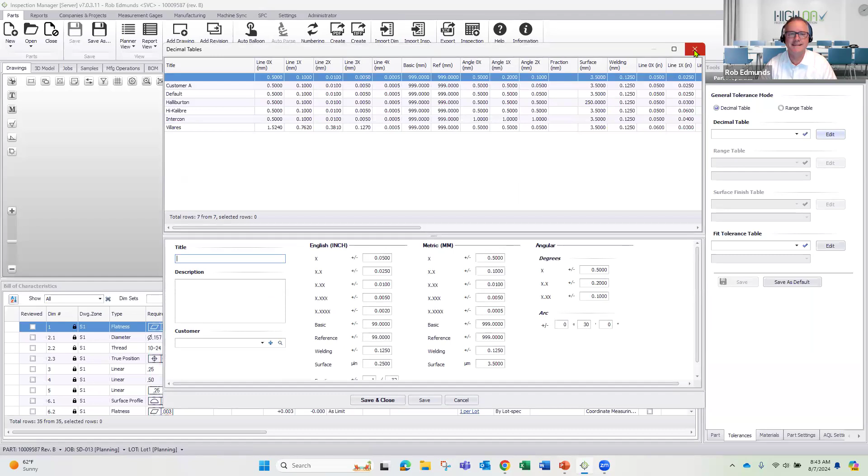So where that is established, and all of this is in place before I went ahead with ballooning, is I can establish my default tolerance table. And you can have as many as you want. You can see here I've got customer specific tolerance tables in place. It could be even part specific. So very easy to establish those tables. And again, that's something that's done prior to actually ballooning the print.

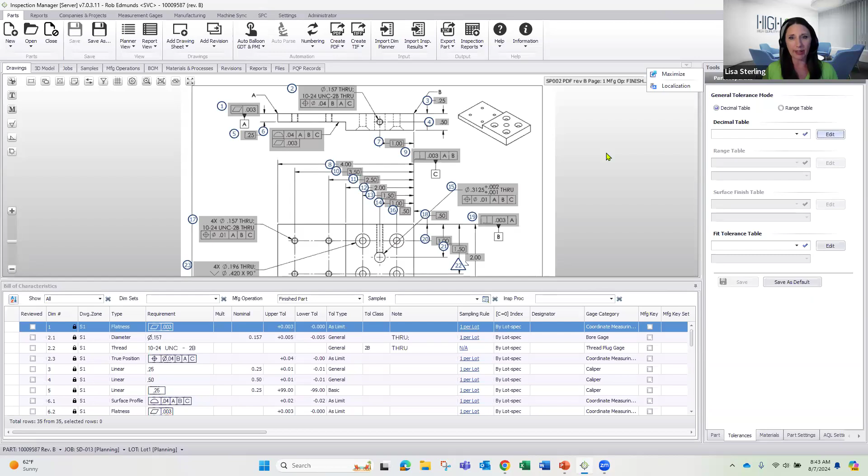More questions? Okay, here's another one. We currently manage gauges in Excel. Do we have to enter all of our gauges into HiQA manually? Thankfully, no. For those of you that do that, do note, built right into the HiQA system is the ability to import gauges, whether it's from Excel or even an undefined format where you can map to the corresponding headers within the HiQA system.

Okay, perfect. It looks like there's just one more question, and we'll go ahead and conclude with that. It says, how long does it take to get up and running on the HiQA software? Ooh, loaded question, Lisa. That's loaded. Let me say this. Within a week, you could be auto ballooning, but the reality is, depending on how much of the HiQA solution you're going to implement, on average, I would say give yourself 3 months. 90 days, no need to rush, no need to panic.

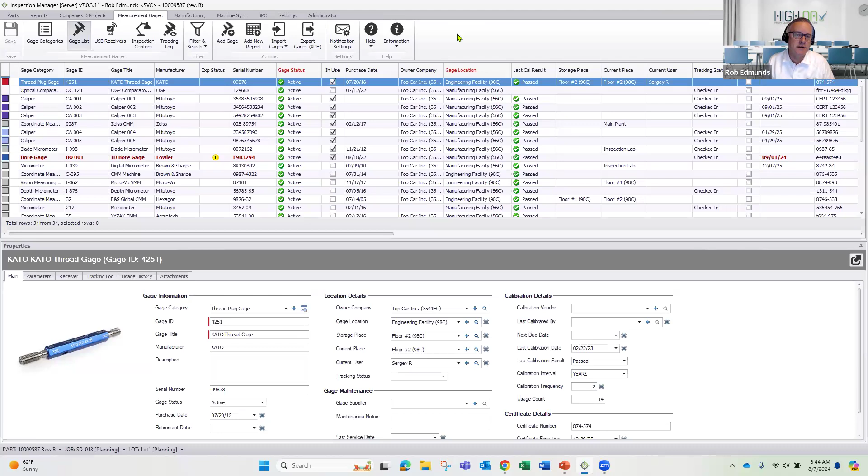You've already got a day job. Now you're taking on this additional task, but it really is based on your resources. We can move as fast as you want, but what I always tell people when they ask that question is, hey, give yourself 3 months and you'll have the system up and running and everybody fully educated on how to use it so you can immediately start benefiting from saving time.